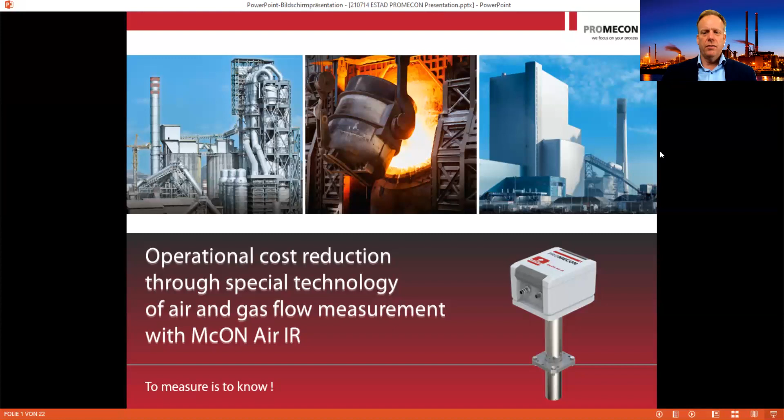So let me show you a little bit about our today's topics.

Our main products at PROMECON are really around the gas flow of process gases. When I say process gas, I mean right in the process of the smelter bath, out of a boiler or a heat exchanger. So we don't measure gases after they've been cleaned and they're nice and cold, but we measure gases when they're hot and dusty. And we do so with a digital measurement method that allows for a drift-free measurement over a long time - and when we say over a long time, we mean years.

So one big pillar of our product line is correlation-based gas velocity measurement. We have also developed microwave-based pneumatic solid transport measurement - for example, pulverized fuel, pulverized coal or biomass, or other materials conveyed in a lean phase conveying system. We have also developed a microwave-based unburned carbon measurement for combustion processes of solids, as well as a stack emission measurement. And when I say stack emission, I mean the flow of process gas through the stack. All very complicated and much more difficult than it seems.

Most of the measurements in the industry and also on the stack struggle with accuracy and drift stability. Our measurements do not do that. Our main focus is on digital measurement in the process, and today I would like to specially talk about a measurement at the outlet of an electric arc furnace or a converter, which is the focus of today's presentation.

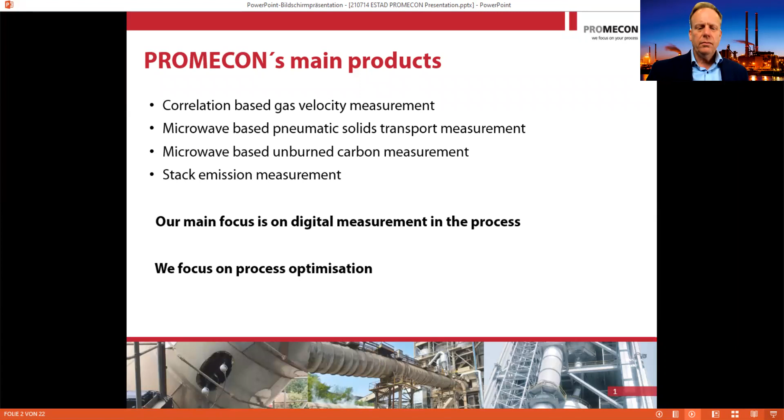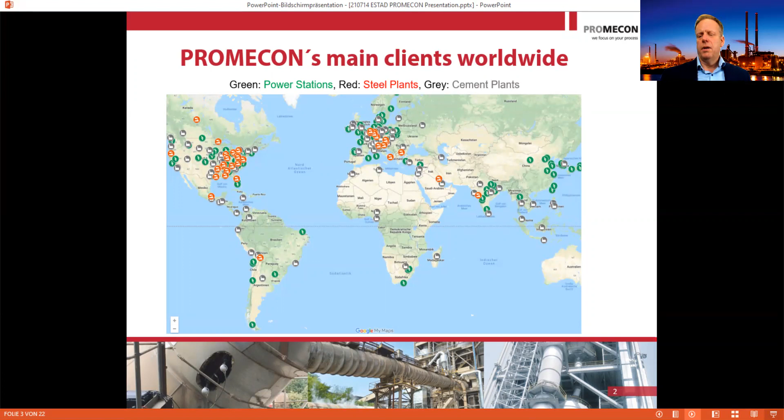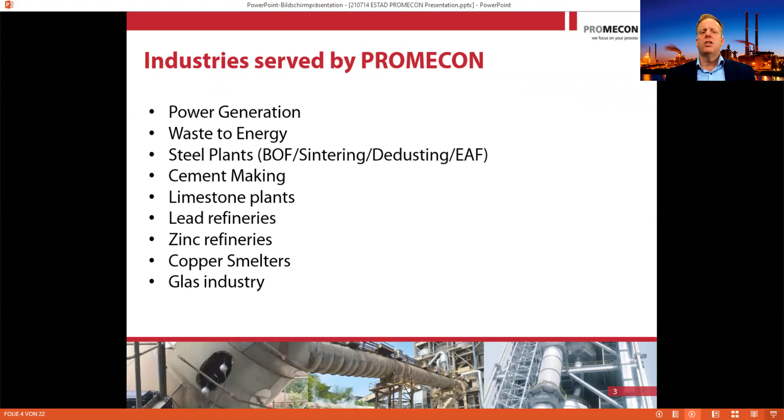All the industries we serve include power industry, waste to energy, steel plants - as I'll be talking about today - cement making and limestone, lead refineries, zinc refineries, copper smelters, so all non-ferrous, and even the glass industry. All these industries have a similar problem: they have hot gases that have a swirl, so they're not easy to measure. They have a spin or a stratification in them. They have dust in them, and therefore they also have very short measurement sections very often. Therefore, they are very hard to measure.

One of the main applications we started with in the steel industry was the measurement of dedusting systems. Many people know that dedusting is a huge energy consumption and a huge energy drain in the plant. And it doesn't matter if it's primary or secondary dedusting systems, they all have in common that usually the flow of dust and fumes is not measured accurately. That leads to the fact that very often the fan is not operated at an ideal operation point.

Now everybody knows, of course, that fan power is a big energy drain. So many fans have problems being operated at their optimum setting. That's very common in the power industry, cement industry, as it is in the steel industry. If you look at the middle of this picture, you can see the typical fan power curve. For many new fans, this curve is highly nonlinear, especially if you're using a variable frequency drive. So finding the right set point for the fan by measuring the flow and also the dust load that goes out of these dedusting systems allows for a lower flow set point.

And if you have a variable frequency drive fan, then reducing the set point by just say 10% can give you over 20, sometimes even over 25%, lower fan power consumption. So looking at the fan is one thing, and that has been a major source of our work over the past 25 years.

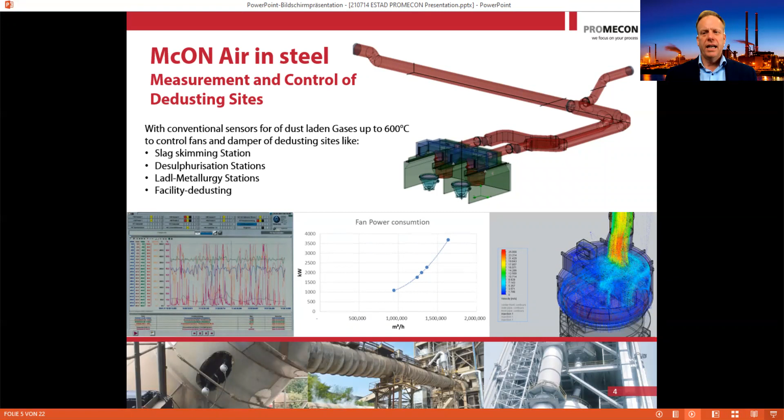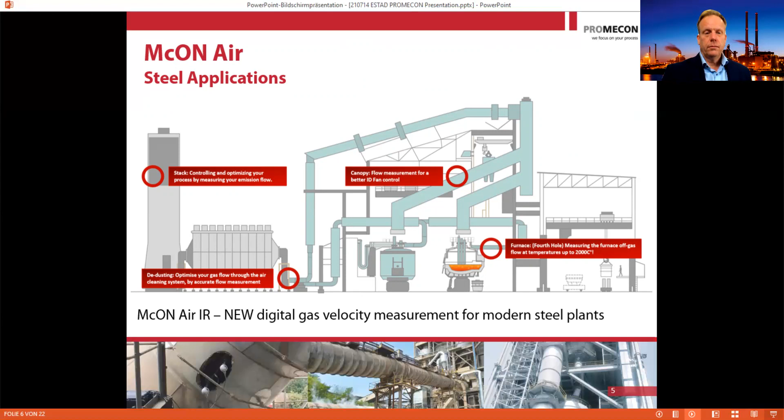So you can see here a little cross section, primary, secondary dedusting, stack flow, all easy. But the point down there on the right hand, the fourth hole, that's usually the hard point to measure. And that's the main interest of people today when they want to optimize an electric arc furnace or optimize a converter. Same thing here, big interest to measure directly on the converter outlet.

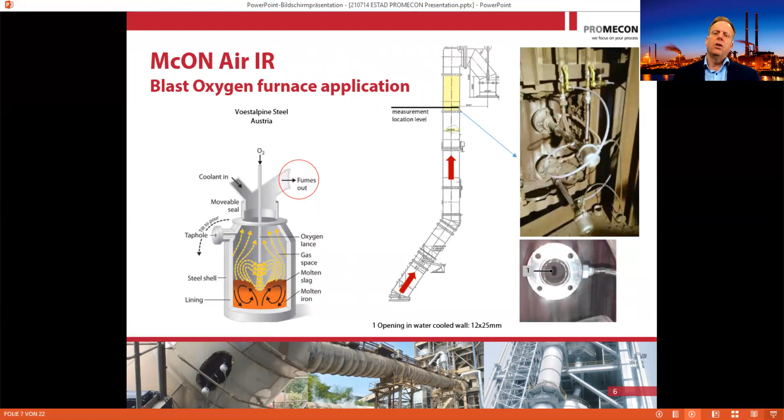The key here is our correlation measurement that we have been using for 25 years in many gas flows. The measurement principle is twofold. First of all, you generate a signal from the process. This signal is usually a random signal. It's a time signature of the clouds of particles that fly by one measurement sensor.

For example, you can measure the electrostatic charge of a cloud that is passing by your sensor. So if there's many clouds passing by this one sensor, you will have a succession of signals on that one sensor. If you now have a second sensor and you make the measurement at the same time, and those sensors are spaced close enough, you will see that the signals are very similar, but they are time shifted. This is the classical correlation measurement that we have been using in many industries.

However, for the steel industry, electric arc furnace outlet, the gases are simply too hot to put any sensor inside the gas flow. So this led us to the new sensor that we have here. It's an infrared sensor that looks into the process rather than having any sensing element inside. So this sensor looks purely from the outside. It looks through a small hole and it looks at the light generated inside the duct.

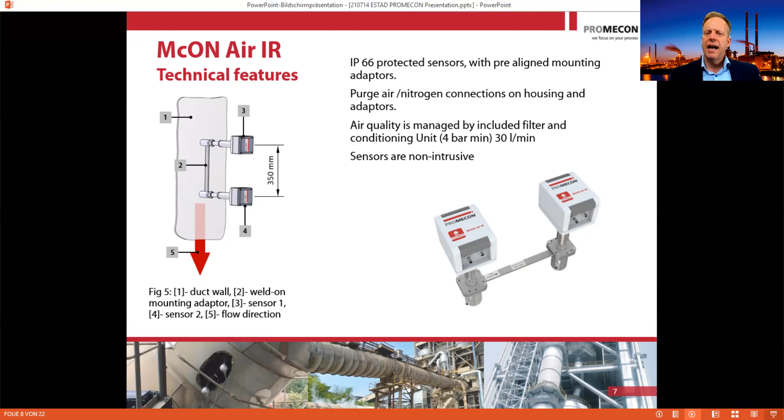Let me show you a little bit more detail. Here you can see sensor 1 and sensor 2. You can see that the light emitted from the gas clouds is putting a signal onto our measurement sensor. So we are sensing basically a random signal. This random signal comes from the random succession of clouds of gas traveling through the duct.

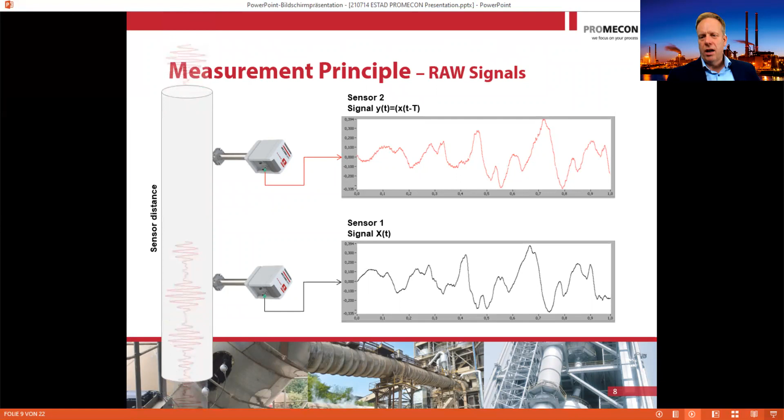When you look at the signal sensor 1 and sensor 2, you can see that the signals are very similar. You can see with your own eyes, you don't even have to guess. Now, if you put these signals on top of each other, if they are recorded at the very same time, you will find that they are very similar, but they are time shifted. They're not exactly at the same time. So what you can see here is that there is obviously a time gap between signal 1 and signal 2.

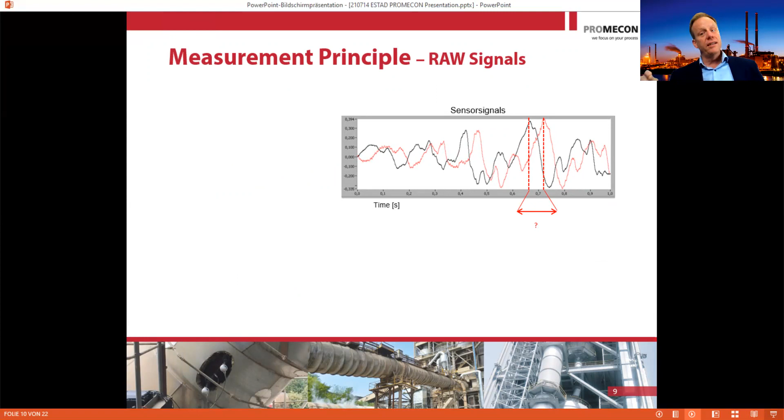If you put that into a cross-correlation filter, this correlation filter will give you a cross-correlation function, which is basically nothing else than shifting the two functions on top of each other until they have the biggest similarity. And that point of biggest similarity, you will see in the correlation function as a clear maximum. And the time shift at which you can see the clear maximum is the time of flight of the gas. So what we are doing is we're having a digital measurement of time of flight of the gas.

If you now take the distance of the sensors, say 350 millimeters, you divide by the time shift that you measure, you're getting a velocity. So our sensors measure velocity. And if you calculate with temperature and barometric pressure, you will get mass flow of the gas or standardized flow. The correlation measurement has some intrinsic advantages over any other measurement in this field.

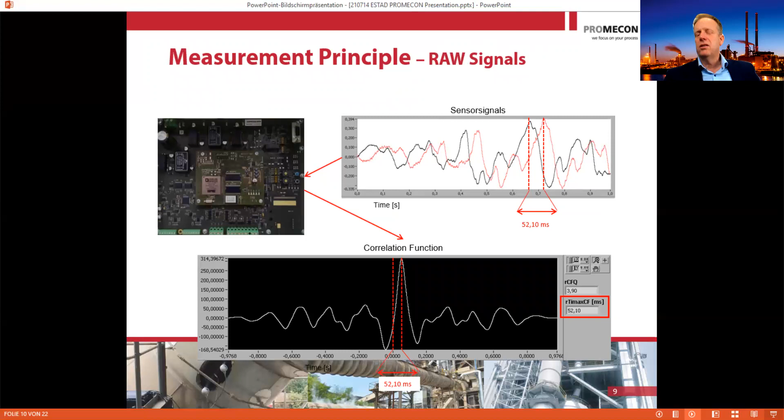This has a very big advantage because we are now recording the velocity as a vector. The distance we assume in our calculation is orthogonal or perpendicular to the two sensors. So if there's any swirl component or stratification, our sensor will not measure that lateral flow—only the flow in the axis direction of the duct. It's a very big advantage. It has helped us in a lot of applications in stack flow, but also in other difficult process measurements in ducts that are very short, so therefore a huge advantage.

Of course, the other advantage is that we are measuring digital, not analog, which means whenever you see a measurement, it will be accurate. You will never see a drift in this measurement, because all we're doing is clocking out two signals in a digital time measurement.

I very often compare this to the old long play record you used to have in the 70s and 80s, compared to a CD. If a long play record has a scratch, you can hear it because it's an analog conversion. If a CD has a small scratch, you will hear nothing because it gets completely corrected by error correction—it's a digital signal recovery. It's the same thing here.

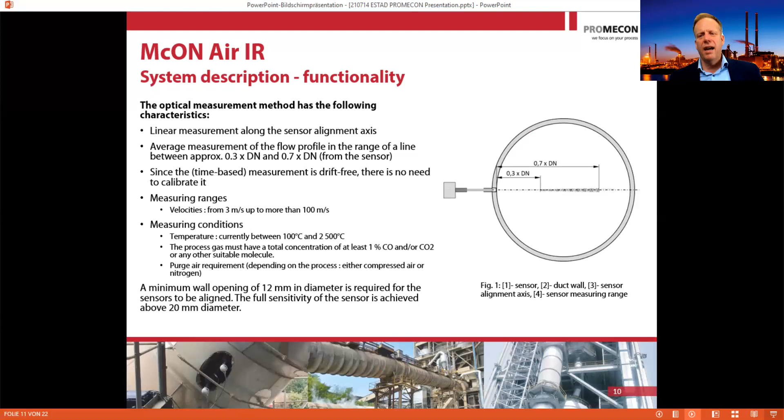If you have a clear signal, the signal will be accurate and there will be no drift. There will be no zero span correction or whatever. This is very important because many plants have the problem that every other day they have to maintain their system. With our system, you will not be required to do that.

Here are our measurement properties in a nutshell: a very wide measurement range, from 3 meters per second up to over 100 meters per second. Characteristic accuracy and drift stability is the main point here, 100% linearity, and all the other issues you find with so many other measurements are not here.

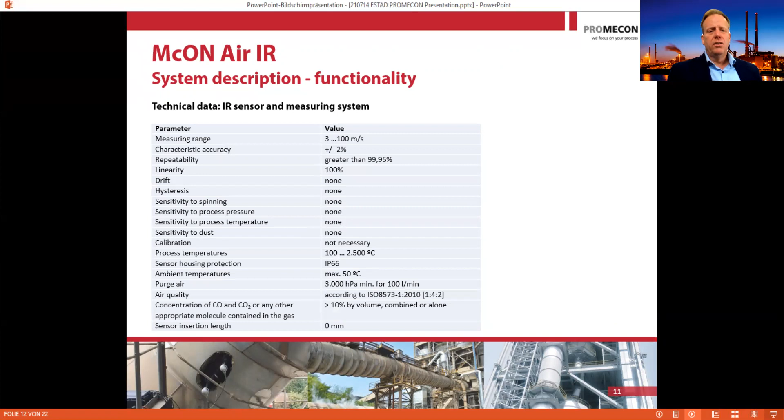So you can now measure the amount of gas going out your EAF reliably—that's the message in a nutshell. We have been doing this in large boiler applications, even with SIL2 certified systems. So we are very well acquainted with safety integrity level instrumentation, all digital, all based on our technology.

When we did that, many clients asked us, how exactly do you measure on the infrared? We mentioned that measurement in infrared is a bit tricky. If you want to measure the correlation well, you have to be able to look at specific wavelengths. Otherwise, you are not able to measure a good correlation. This is part of our patented technology.

The first question then was, if you are looking at wavelengths, can you measure specific elements? And of course we can. We are mainly looking at the wavelength of CO2, but also CO, water vapor, NOx, or CH4 is no problem. So basically our sensors are looking at specific wavelengths. We can see how much velocity the gas has, but at the same time we can also measure the content of certain constituents, like CO2.

We can measure the content of CO or H2O. So if you put our instrumentation on your furnace, you will automatically get all these constituents along with velocity, and you can use that to optimize your process.

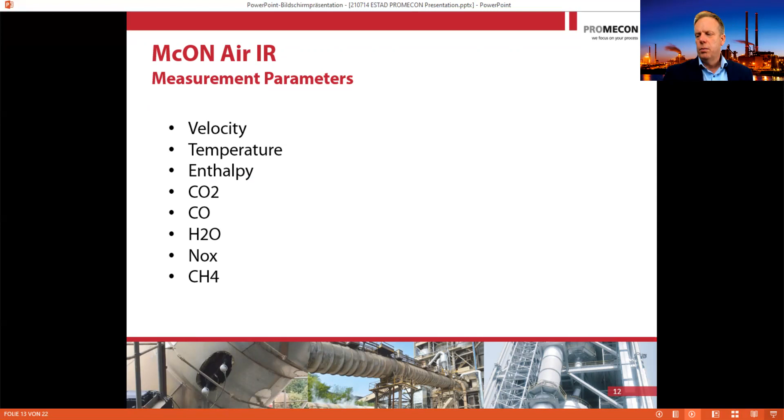Here's how the system looks like. You have a main panel with two sensors for velocity, and then for each constituent you have a separate sensor. So if you want to measure velocity, CO2 and CO, you're looking at 4 sensors. If you want to add H2O, maybe there's 1 or 2 more sensors.

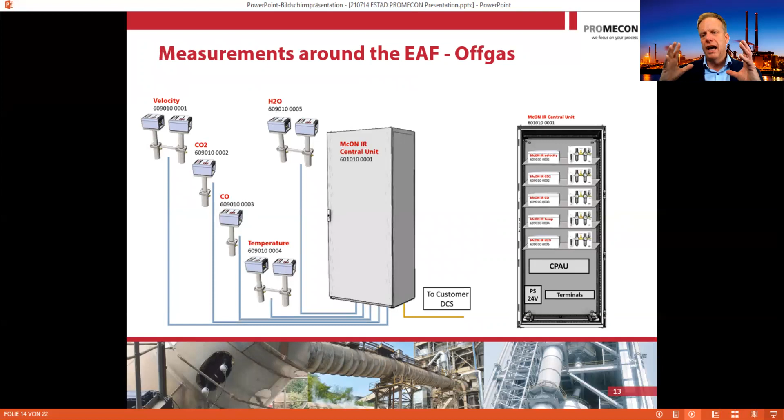We hope to be able to get the temperature out of the process as well, from the sensors we are already using. So we believe that including temperature, we'll be looking at 5 to 6 sensors that you can position on the outside of your fourth hole.

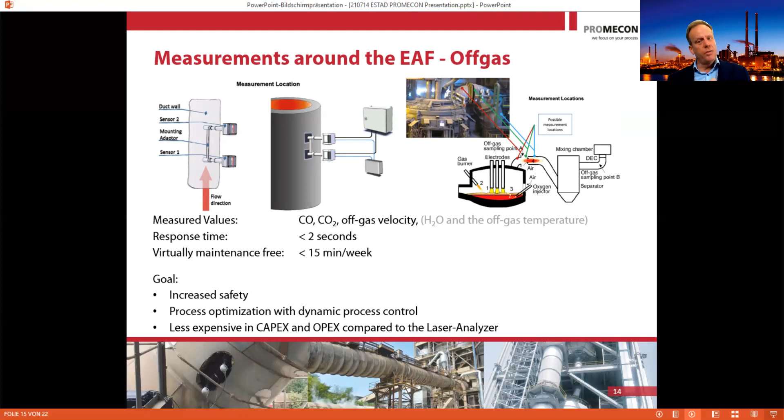This is how it's all mounted. You can see the electric arc furnace on the right-hand side, and right behind the air gap you can mount our sensors. Our sensors can measure very well through cold air, simply because they're not measuring transmission, they are measuring emission of light. So if you put our sensors right downstream of your post-combustion air gap, they will still see the CO and CO2 very well, because they are looking right through the cold gas onto those constituents.

So this is a typical example of how our sensors are installed. This is a water-cooled duct, and this water-cooled duct has a mounting plate where our sensors are mounted. Please remember, nothing of our sensor will reach into the process. We're all only outside the process.

So also the alignment of our sensors is not very critical. If our sensors are aligned a little bit at an angle, it doesn't really matter to our measurement values. Very simple to install and also very low in maintenance.

All of our sensors have cooling air or cooling nitrogen through the housing up to the front of the sensor, where we have a seal air cap that prevents any dirt from getting into our sensor. So our seal air cap allows us to use the sensor without getting dirty or getting some problems with dirt and dust.

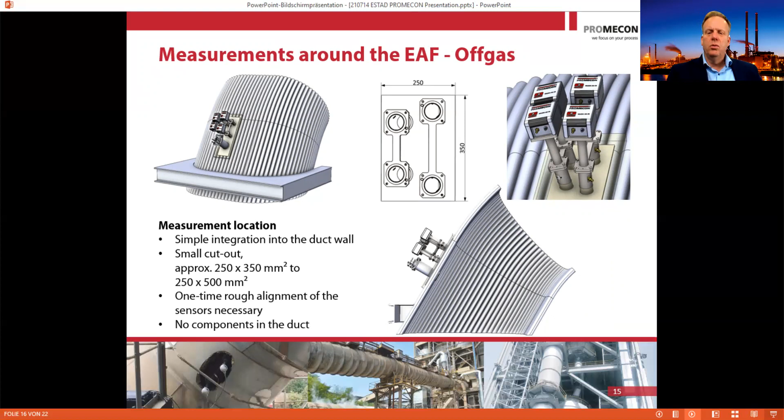The sensors have been running for many, many weeks now in many plants, and there's no need to take them out or to clean them on a regular basis.

Our response time is usually 1 second. So you have a real-time measurement of our system.

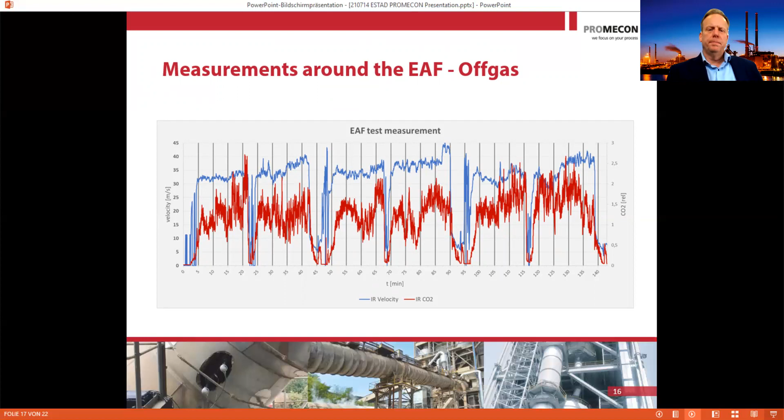There are also other systems on the market. We are aware of that. There are extractive systems, which are, in many cases, we have found to be quite difficult in maintaining well.

There are also laser-based systems out there. The laser-based systems usually have 2 disadvantages to look at. The first one is that a laser cannot protrude through a very long path if there's a lot of dirt and dust. So you need to put the lasers fairly close to each other, and that means that you can only look at a small gap.

Especially, the laser is not very good at looking through cold air. This is one of the main advantages of our system. We can look through the cold air gap, and therefore we don't have to put anything inside the duct. We don't need any inside duct things, so we can just look from the outside.

The other disadvantage of the laser, of course, is the misalignment. The two laser heads have to look at each other. Our system is only from one side. The PROMECON system looks only from one side and does not look into the process, only from the outside. Very simple, very easy.

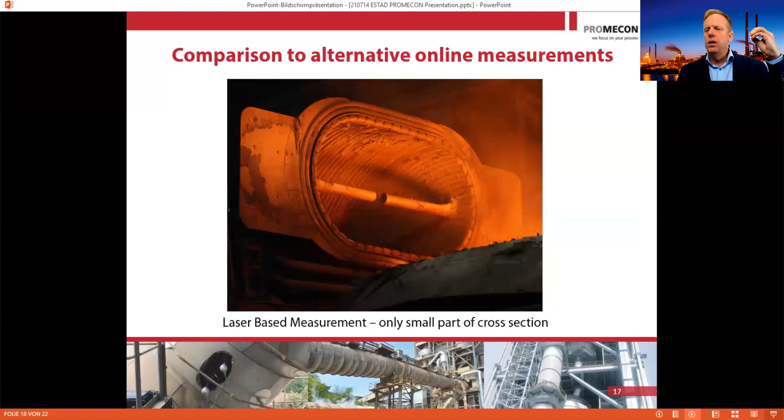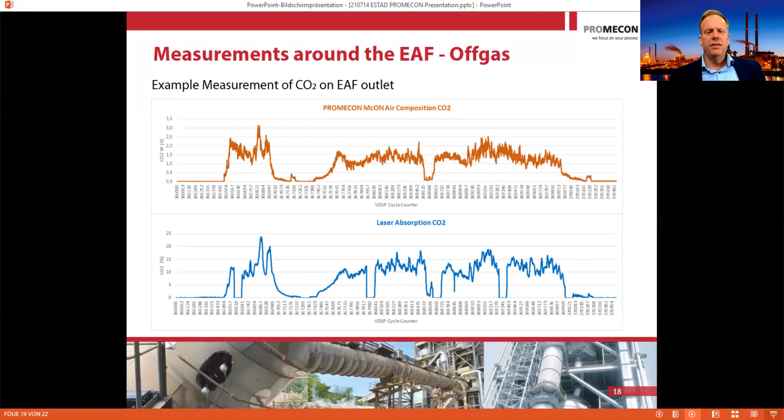And also what you can see on the laser-based signal down below is that there are several points in the measurement where the laser drops out, maybe because of alignment issues or whatever. So there are always these gaps that make it hard for the operator to run the process smoothly. And our system, by definition, does not have these dropouts. So much easier, much more reliable.

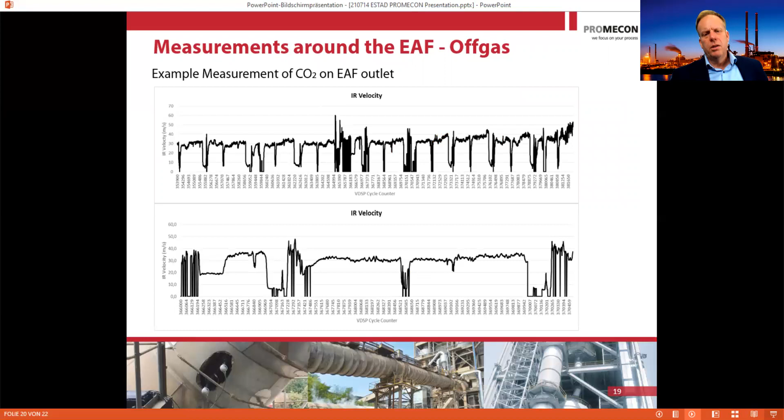Here again, you can see a typical trace of the infrared measurement of velocity based on the CO2 constituents of the gas. It's a very good application for high temperature.

It's very well suited for EAFs and BOFs. You can measure the mass energy balance with it. You can see also how to optimize your burners in the EAF. You can optimize your blow cycle in the BOF. I don't think I have to tell you all the advantages that you can derive from this in your process, but we believe that the payback of the system in any EAF plant will be very, very quick.

And therefore, we think that there will be a lot of interest generated in the industry with this system.